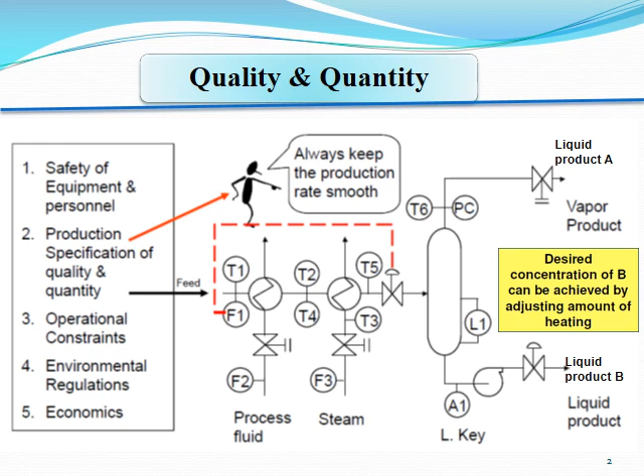Environment regulation. Environment laws. What do they mean by this? They mean we should not release any substance harmful to the environment. The control device plays an important role in this. That means it's banned for any substance to be released into the atmosphere.

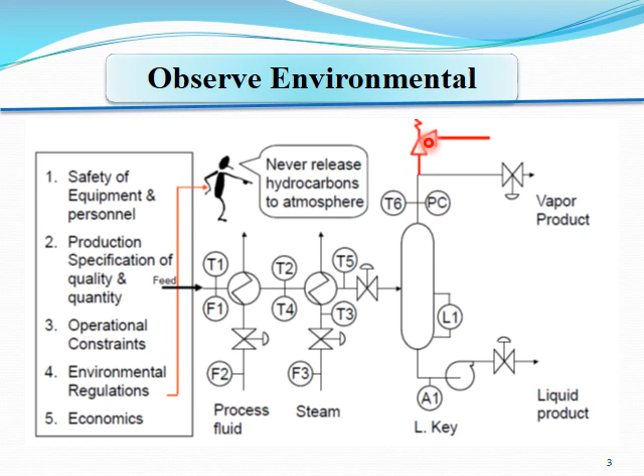And finally 5, economics. See the red line here? Economics, which means how much heat we are delivering. The steam, of course, costs money. The steam comes from boilers, and in the boilers we use, for example, natural gas or LPG or coal or anything to heat the water and convert it to steam, which means when the quantity of steam increases, we lose a lot of money.

If this goes without any benefit. How do we control this? By this analyzer. If this analyzer detects that the concentration of this product is okay, it will control the quantity of the steam delivered, or the quantity of process flow in this control valve. In this way we can control the economics, or the lost money in the boilers.

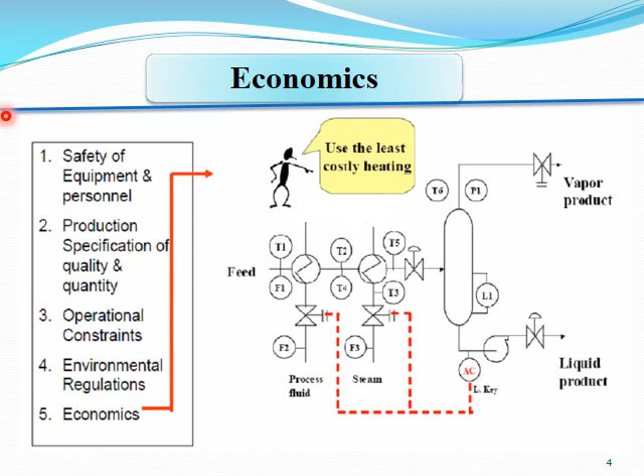Now we will move to fundamentals and concepts of process control system. We will start with the old times, how they started controlling. We will classify the control system and see how it works.

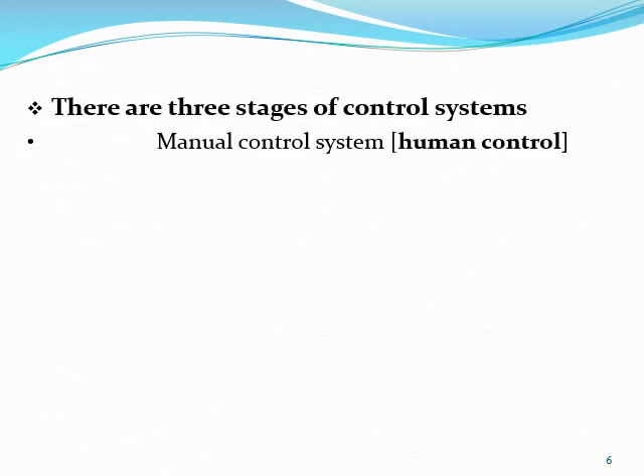There are 3 stages of control system. Manual control system, that means it's controlled manually. It's human responsibility. And there is automatic control system. I remember in the class I gave you an example of the water tank, when we put a float to stop the flow when the level goes to maximum. This is mechanical, but manual control system is like this one. There is an example coming.

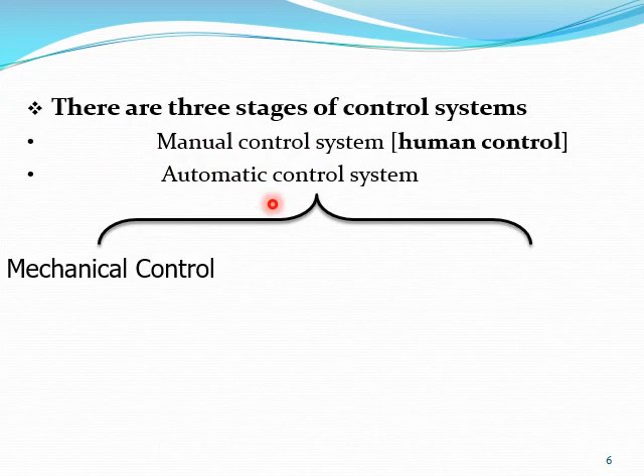And the automatic control system could be mechanical, like the example I gave you, and could be electronic, by software and electronic devices. The mechanical control system could be hydraulic or pneumatic. Hydraulic means the power drive is liquid, and pneumatic means the power drive is air.

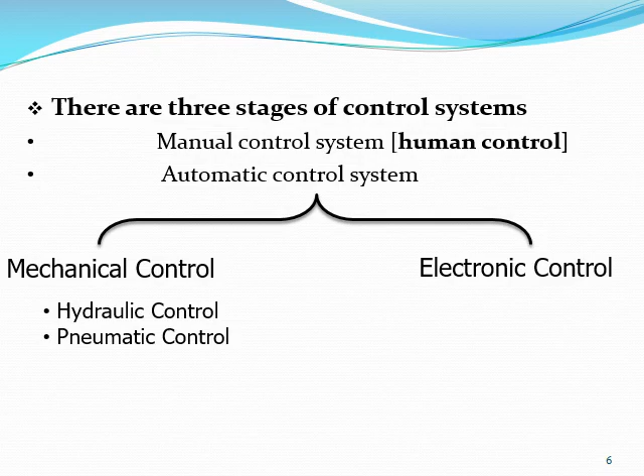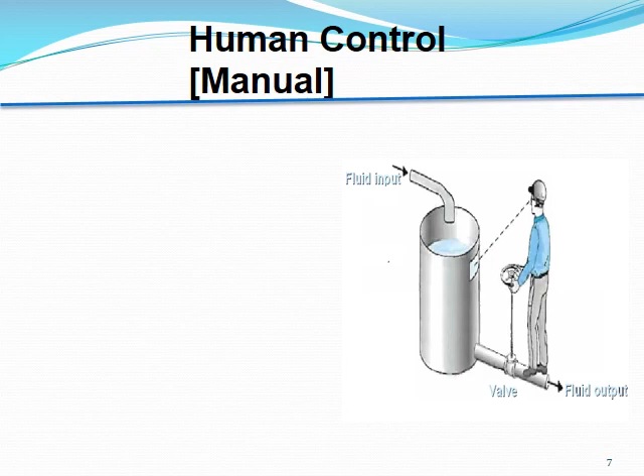Suppose 50%. When the level goes high, he increases the opening of the valve in order to maintain the level at 50. And conversely, if the level goes down, he closes this manual valve. This is human control. What about the other? There is another example, this heater. This is process heating. You see the temperature gauge.

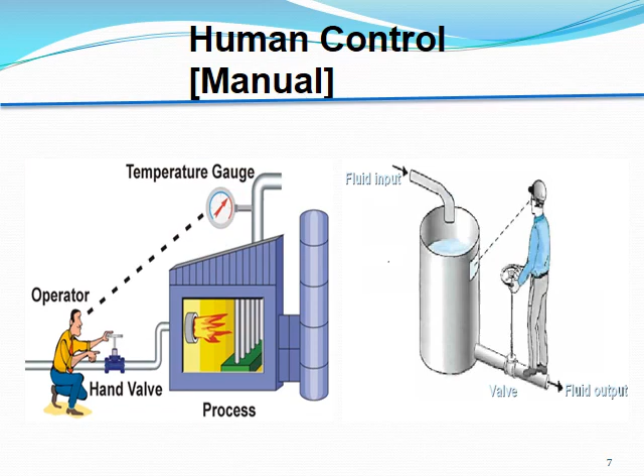About mechanical control, this is exactly the example I gave you. Floater, flow tank - this is a storage tank for water or whatever. When the level goes up, the floater will go up also with the fluid and close the inlet. This closes the inlet, and the water will stop flowing. This is mechanical.

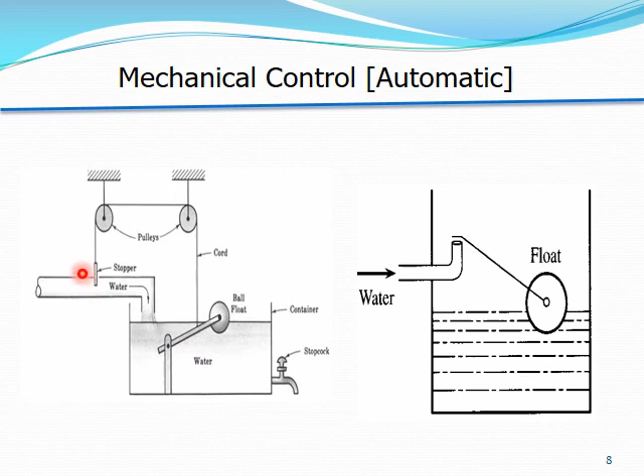Same example here. Notice there is a steady flow here, and there is a gate valve here. Whatever, if the outlet is open or closed, no problem. The control is with this floater to control the inlet flow at a certain level. When the level almost reaches maximum, the floater is in the above position, so this sling will allow the valve to go down and close the inlet.

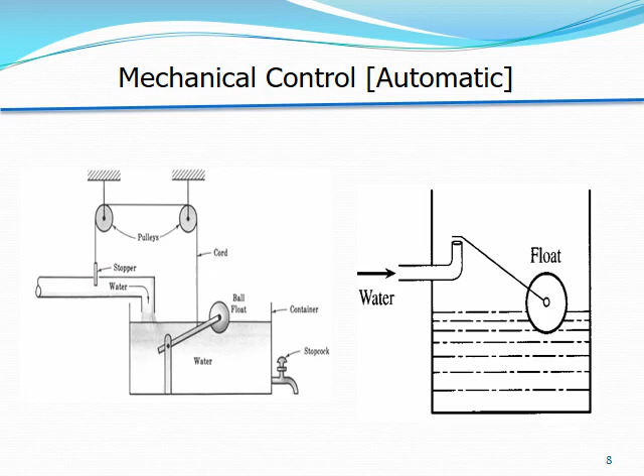As for electronics, if you see, this is the same example as the manual control, but we install here a control valve which works pneumatically or electrically. This is how it works. This is a main important device in this process, which is the controller. If you remember, I told you there are three major elements of a control system: the sensor, this one, the controller, and the actuator.

The sensor senses the temperature here and transmits the signal to the controller. Here the green number is the set point, which means I set the controller to keep the temperature of the material inside the tubing at 85 degrees centigrade, for example. This is the set point, and the red one is the actual temperature.

When the temperature stays around the set point, the control valve keeps steady; the opening position keeps steady. If the temperature goes down, the signal comes to the controller, and the controller will process the data and give the signal to the actuator, this control valve, to open to allow more gas. Otherwise, if the temperature goes up, it will close this control valve.

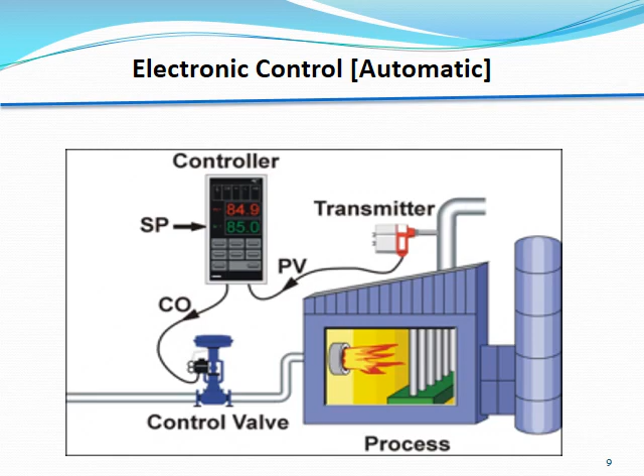Okay guys, let's start now with the classification of control strategies. What are the strategies we have here? The control system, as a system, the control strategy can be classified into three sections or three types.

The first one is open loop control system. The second is closed loop control system, and the third one is feed forward control. What are they? Let's have an example to define them. But from the word itself, loop control system, open loop, that means no feedback. The result is not important. There is no sensor to sense the results.

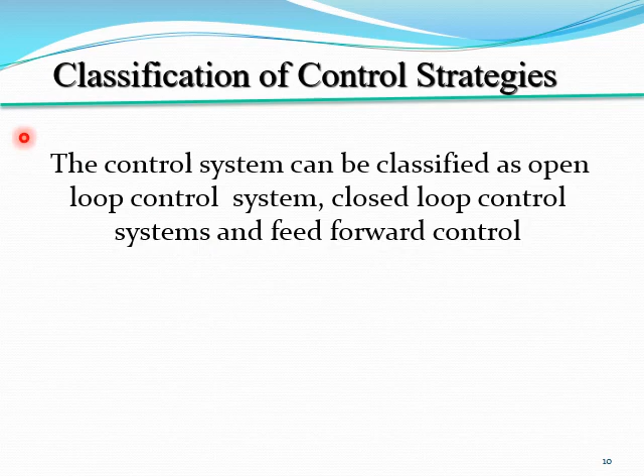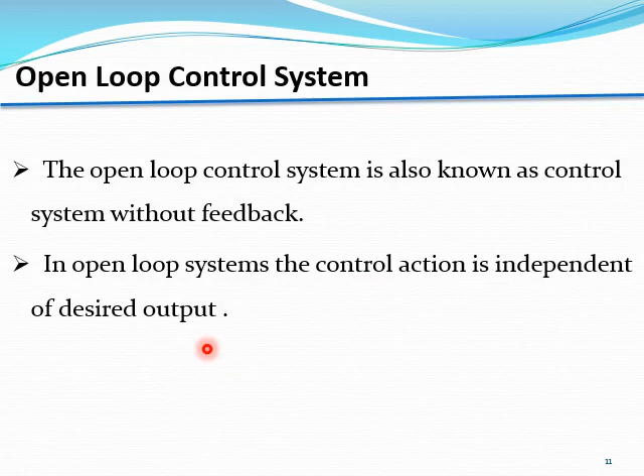But closed loop control, next slide. For example, for open loop control system, let's start with open loop control system. The open loop control system is also known as a control system without feedback. There is no feedback, the result is not important, but it is a control system. In open loop system, the control action is independent of the desired output. The manipulated variable, or the variable you control, is independent from the desired output. The desired output does not depend on the control action. Like what? See this example, heat exchanger.

I think most of you are familiar with this drawing, with this device. This is called a heat exchanger. When we want to exchange heat between two matters, for example a process stream, that means the liquid we want to change the temperature of, for example to increase it, as long as there is steam, that means we need to increase the temperature of the process stream.

The process stream goes into the heat exchanger, into the inside of the tubes. In the middle here there is a tube, and the shell is between the tubes, where the steam is supplied. Here is the outlet of the process stream, the heated stream with the temperature we need to increase, for example.

As you see, is there any control? Of course, this valve. I think it will open to a certain position, for example 20%, 30%, whatever, and the process stream temperature will keep rising until, I don't know - it's open loop. That means this temperature does not depend on, is not related to or connected to, the quantity of the stream.

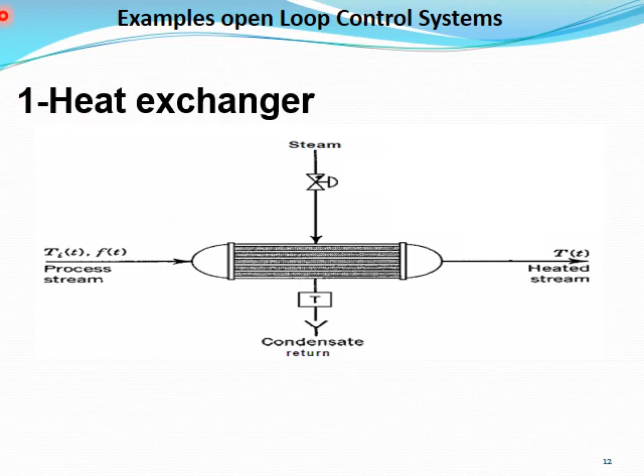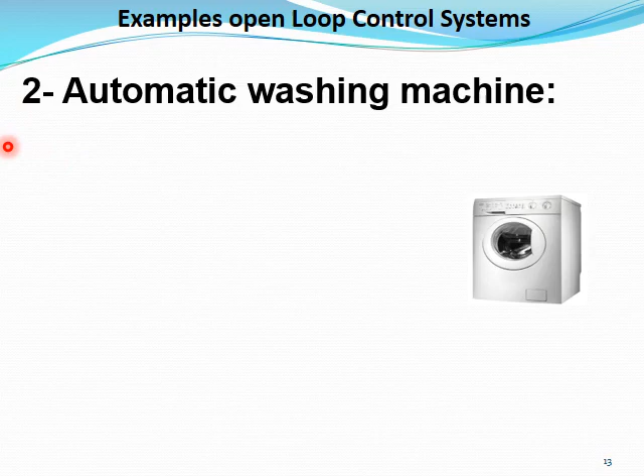Let's see another example: an automatic washing machine. You just put the soap, put the water, start it. It will run for some time and give you the result. But you don't know whether the clothes are cleaned enough or not.

In the machine, the operating time is set manually. You set the time, 5 minutes, 3 minutes, or whatever. But after this time is over, the machine will stop. Do you know when you open it and remove the clothes whether they are clean enough? The result does not depend on the time.

Next, another example is automatic traffic control, which has 3 lights. It controls the traffic by setting the time of each lamp. For example, the red lamp time set point is, for example, 30 seconds or 1 minute. When this time is over, it will change to yellow or to green.

The result is not important here. Sometimes maybe there are still a lot of cars in the traffic, and the color becomes red again. In this example, it's open loop.

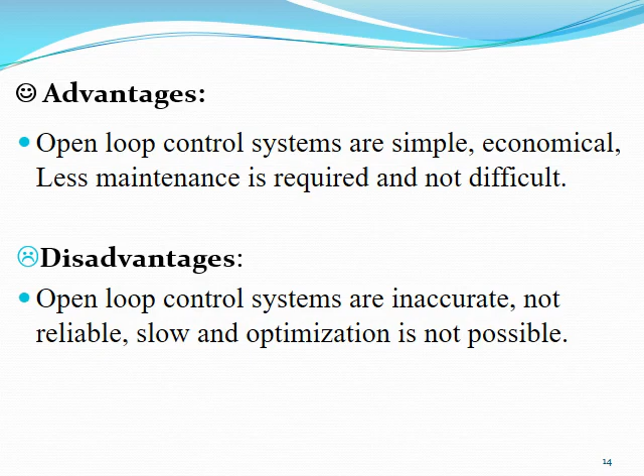This is the open loop system. Let's see the closed loop control system.

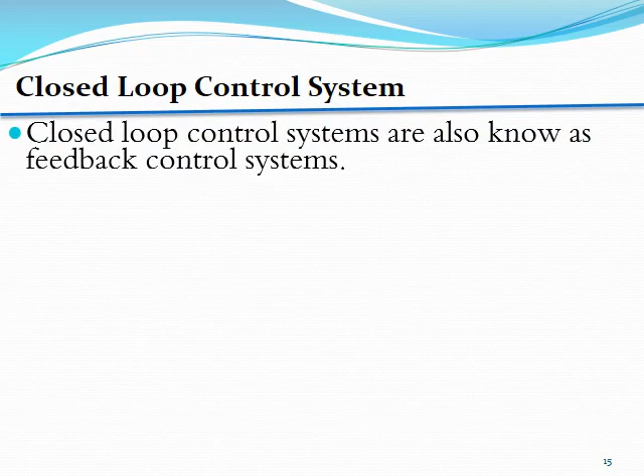Closed loop control systems are also known as feedback control systems. In the closed loop control system, the control action depends on the desired output.

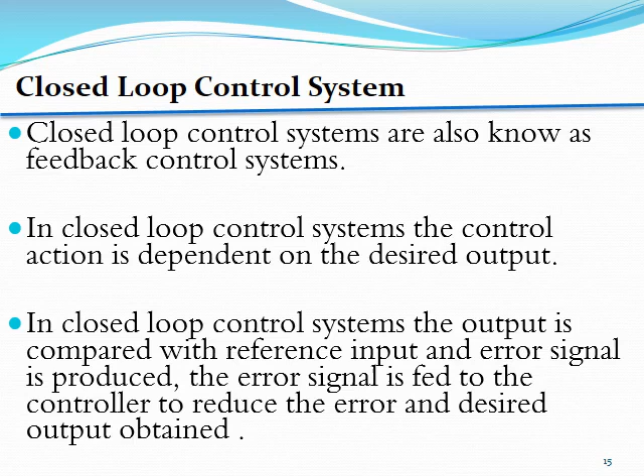As long as the difference between the set point and the actual value is big, the error is big. The error signal is fed to the controller, and the controller tries to reduce this error until the desired output is obtained.

Let's see the same example of the heat exchanger.

What's new here? We installed a temperature transmitter to sense the temperature, and this sensor is connected to the controller, which is supplied with a set point, and it is connected to the control valve of the steam. If the temperature goes high, the controller will decrease the quantity of steam in order to reach the desired set point.

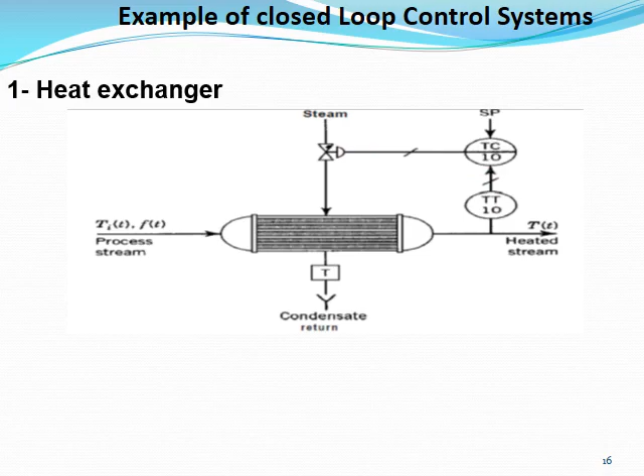For this example: in a room we need to regulate the temperature using an air conditioner. There is a thermostat or sensor for the temperature. You set it at 20, then if this thermostat senses the temperature has reached 20, it will shut down the compressor of the air conditioner.

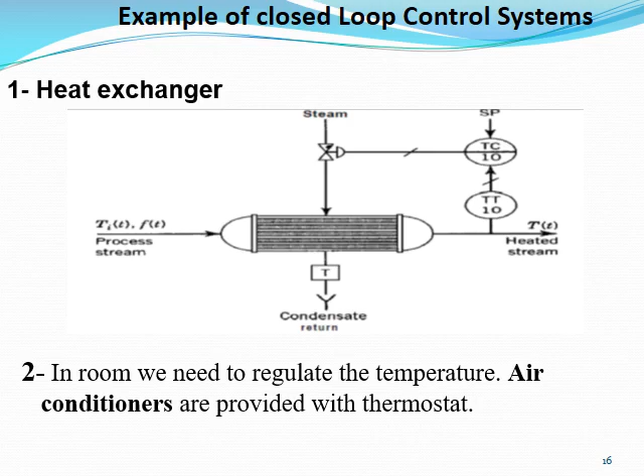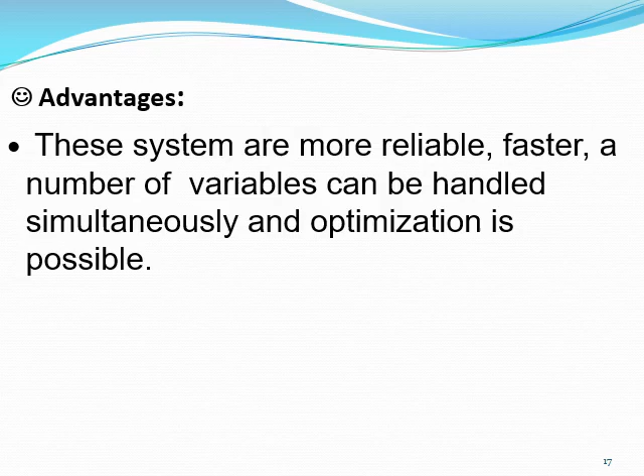Advantages: this system is more reliable and faster. A number of variables can be handled simultaneously, and optimization is possible - meaning you can do optimization and control, increase or decrease. Disadvantages: it's somewhat expensive, maintenance is difficult since you need new devices and sensors, requiring maintenance, and sometimes installation is complicated.

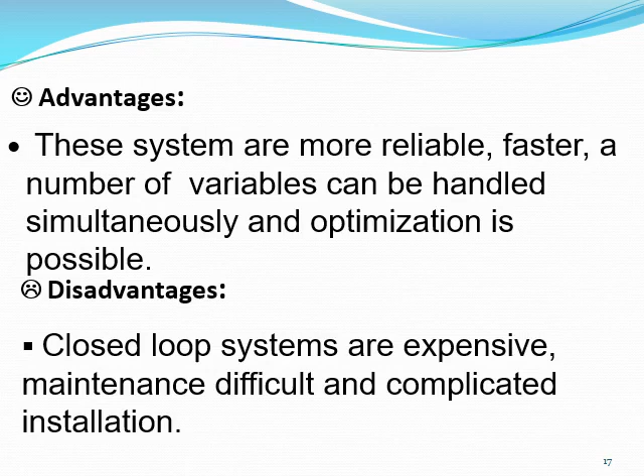Now the last type, which is feed forward. The objective of feed forward control is to measure the disturbances. Now we have something new entering the control system, which is the disturbances - an external element in the area you control that can affect the result, such as... you'll understand with examples.

The feed forward control system measures this disturbance and compensates for it before the control variable deviates from the set point. Meaning before the control variable gets away or far from the set point, it measures the disturbance and based on that generates new suitable control signals. When feed forward control is applied correctly, deviation of the control variable is minimized - meaning if you remember the graph I drew for you, it stays right on the set point line.

Feed forward controller measures the disturbance variable and sends this value to the controller, letting the controller manage it, and according to this value the controller will adjust the manipulated variable. For example, in the heat exchanger example, the manipulated variable is the quantity of steam - the quantity of steam entering is what gets changed, what the controller controls.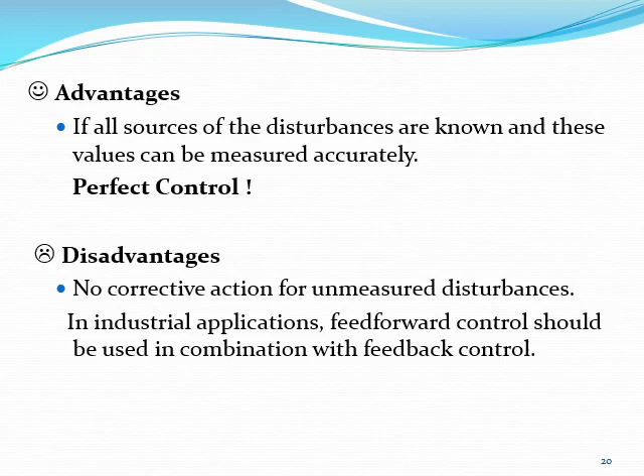Disadvantages: no corrective actions for unmeasured disturbance. In industrial applications, feed-forward control should be used in combination with feedback control. The only disadvantage is that it cannot correct the disturbance itself - in the previous example the flow cannot be controlled directly since there's no flow meter or control valve on the flow, but since it's a disturbance, it controls the temperature instead.

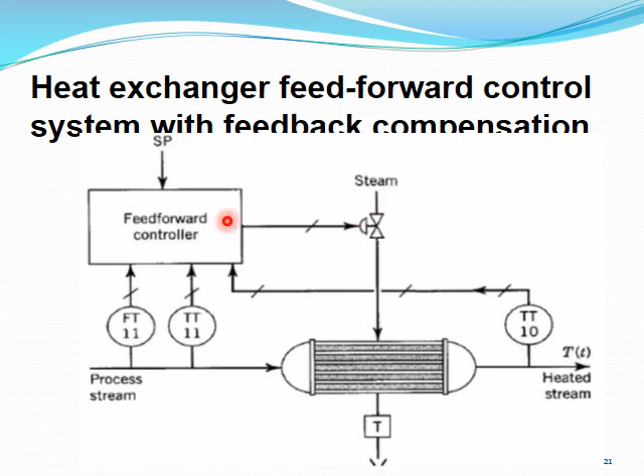Look at this last example of the feed forward control system - this is the perfect control. We have the process stream entering here, with a flow transmitter, a temperature transmitter for inlet temperature and outlet temperature, and all of these go to the feed forward controller with a set point, and it controls the steam quantity coming here. I think that's enough for this video.